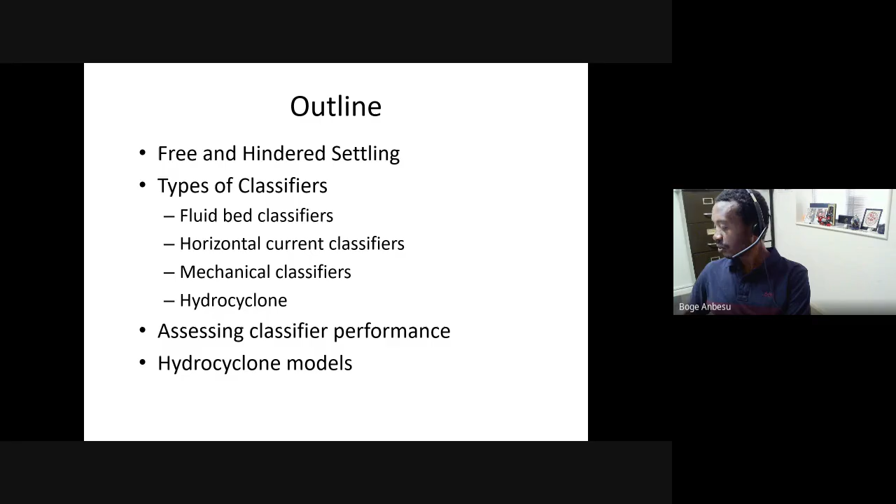We'll do a couple of examples on that to see how it's applied, and we'll also look at a couple of hydrocyclone models. This may not necessarily be what you need to know, but I want you to understand there are a number of models out there we can use to predict the performance of a hydrocyclone. The models can also be used to design hydrocyclones, and even to get an idea of how many hydrocyclones, for example, you'd need in a typical operation.

So in terms of classifiers, there are probably a few different types, mainly classified depending on how they actually work. For example, in sedimentation classifiers, you'll be dealing with fine material, say about 100 to 150 micron material, and you want to split it into very fine particles, say less than 20 micron, and coarser particles. To remove the finest particles into an overflow stream and recover the coarser portion, we can use water as an aid in the classification.

What we can do here is have a feed material containing different sizes. In sedimentation classifiers, pulp density is typically what we use to quantify the percent solids in the feed—say, for example, 50% solids coming in. What we normally use is water going against the feed: feed comes from the top, water goes against the flow. As we discussed last week, if particles can resist the upward flow of water, they settle through it and can be collected as a coarse product. But if particles are too small or too light, the water pushes them up and they go to the next classifier.

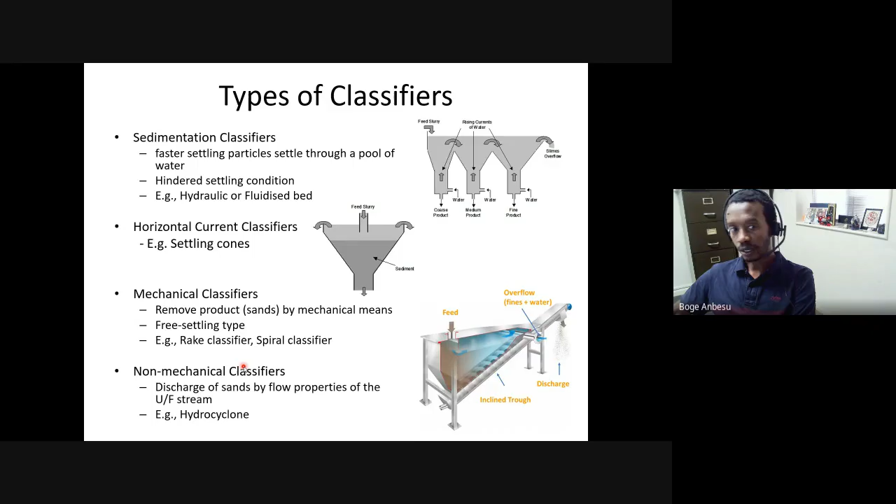They're purely based on the properties of the solids that we're feeding into this equipment. Based on the size of the solids we're feeding, or based on the density, we can track the motion of the particles and separate the coarser solids from the finer ones just by using cyclones. I'll talk about hydrocyclones in the next slides.

So how does a hydrocyclone work? A hydrocyclone is basically a conical shaped vessel, where your feed is introduced in a particular motion. When you introduce the feed to a cyclone, you introduce it from the top, and it follows what we call a tangential motion.

So feed is introduced and makes a spiral motion inside the cyclone. We're purposely introducing the feed in such a way that it forms a spiral motion inside the cyclone, and these are operated at very high pressures. The internal pressure inside the cyclone is very high.

What should happen is, as particles do this circular motion, if particles are coarse, they will have a net centrifugal force that pushes them to the wall of the cyclone. So coarse particles will tend to aggregate around the wall of the cyclone.

Fine particles will have a drag force influencing the motion inside the cyclone, and drag force usually acts inwards. So in this case, you have solids that are coarse or dense going to the wall, and solid particles that are smaller or lighter being dragged to the center.

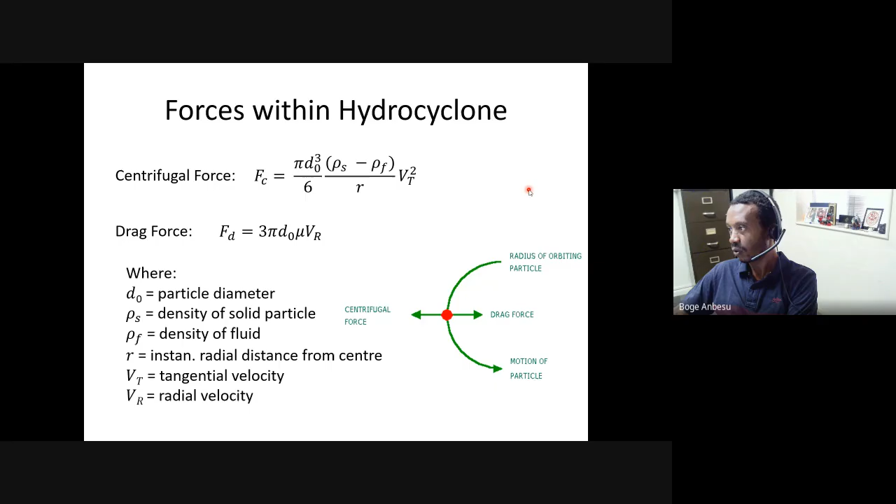Feed goes in initially unclassified, but as it goes down, because you're constantly feeding, particles are constantly coming, so whatever entered the cyclone will be pushed down and more feed will come in. This is a continuously operating process.

As particles go into the middle of the cyclone, forces will act on them, and the solids that are larger will be dragged to the wall of the cyclone, and eventually they will make their way down the cyclone and exit here.

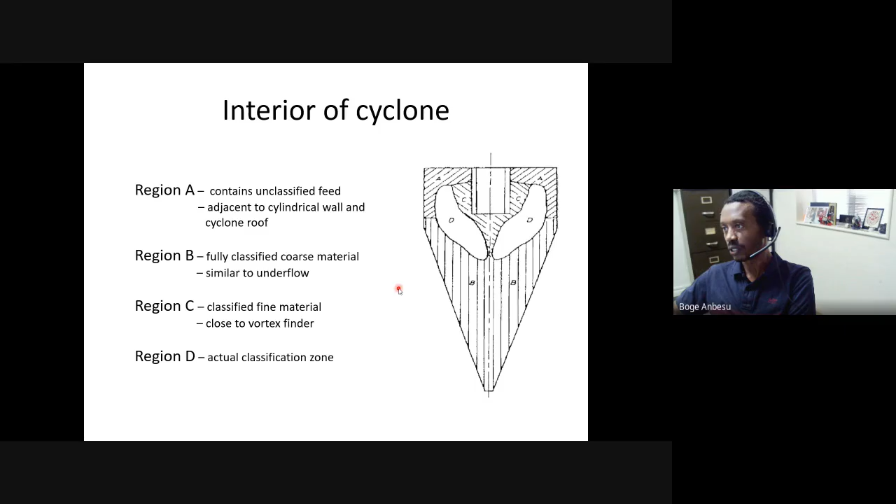I mentioned that when we introduce the feed into a cyclone, it's usually in a tangential motion, so we give it a swirly or spiral motion as it goes into the cyclone. There can be slightly different designs.

You can have maybe a bit of both. The partial involute takes a bit of the design of the tangential and that of the involute, and you can have that in this manner as well. Which one you choose will depend on your requirements and what you're trying to achieve.

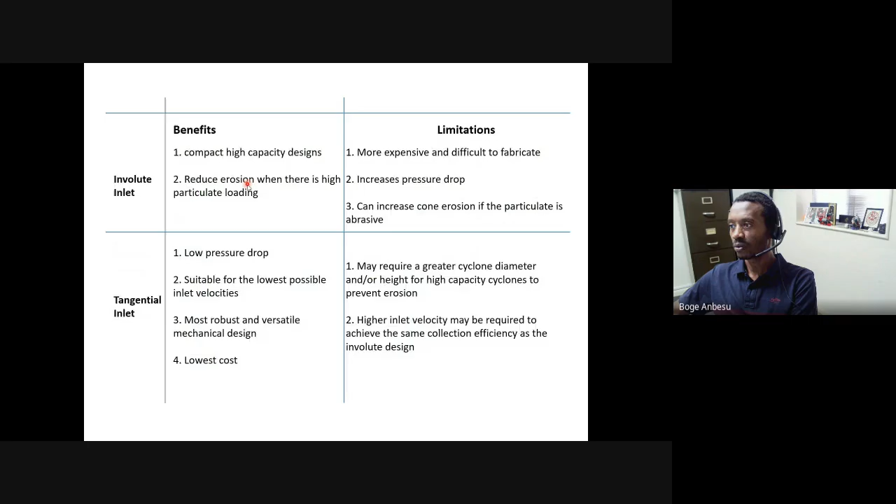The tangential motion is by far the most dominant, but there are benefits and limitations of each design. For example, in the involute design, it usually works well and is compact because you have a very wide opening area where the feed can enter the cyclone. You can also operate them at higher capacity.

As particles enter the cyclone, they will be dispersed, so erosion of the cyclone is not very high, unless you are overloading it or have abrasive particles, in which case erosion will still occur. But because particles are released into a wide area of the cyclone, erosion of the interior is usually minimized.

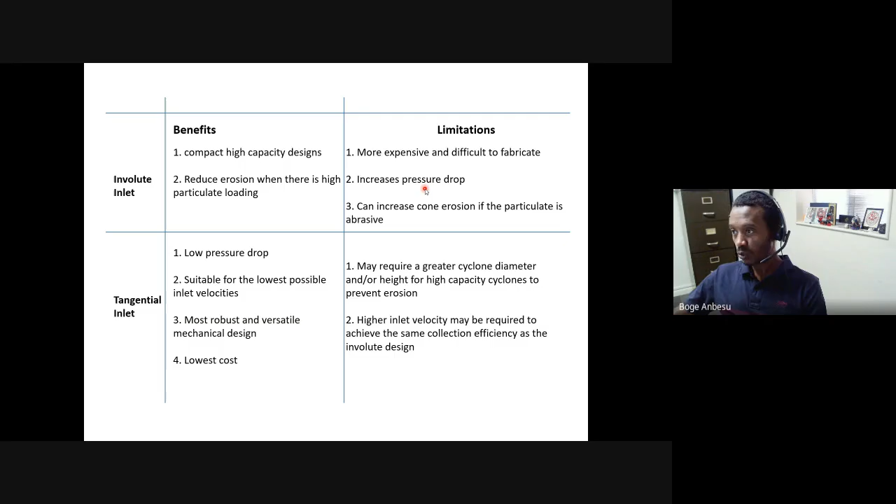What are the other limitations for the involute inlet? It's probably slightly more complicated to fabricate—not impossible, but more sophisticated than the tangential inlet. And because particles enter in a wider opening, you will have a significant pressure drop as particles go into the cyclone.

With pressure drop, the forces acting on the particles will vary. For example, with very high pressure, fine particles can attain centrifugal force and be drawn to the wall of the cyclone. If the pressure drop inside the cyclone is very high, meaning lower pressure inside, coarse particles may go to the overflow and report with the fine portion. These are some limitations to consider with significant pressure drop inside the cyclone.

In contrast, with a tangential motion, the opening is very minimal, so there's less pressure drop inside the cyclone, and fine particles can be classified properly. That's one advantage of a tangential motion—along with lower costs in comparison to the involute.

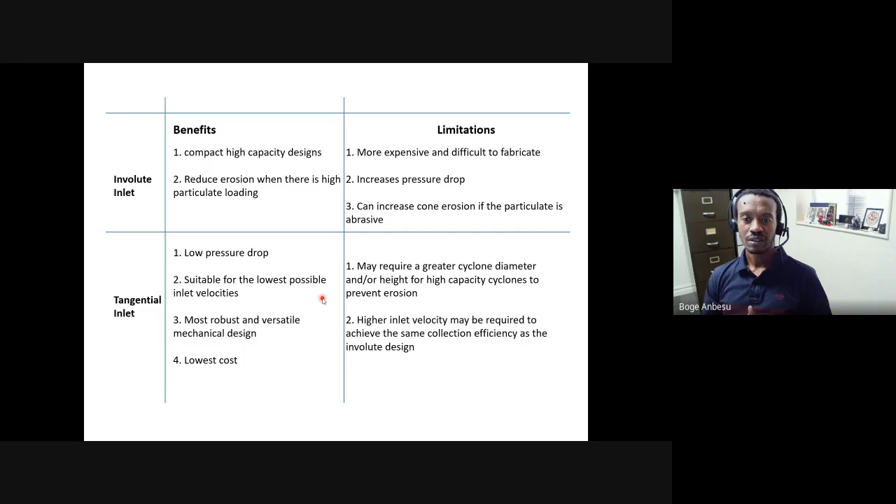As I mentioned, tangential inlets are very common in many places; people just use them as their cyclone feed, mainly because they're lower in design and cost, which is one advantage. One major limitation is that because feed goes in through a narrow opening, they usually have reduced capacity compared to the involute inlet, where particles can enter in a wide area, allowing the cyclone to operate at reasonably high capacity.

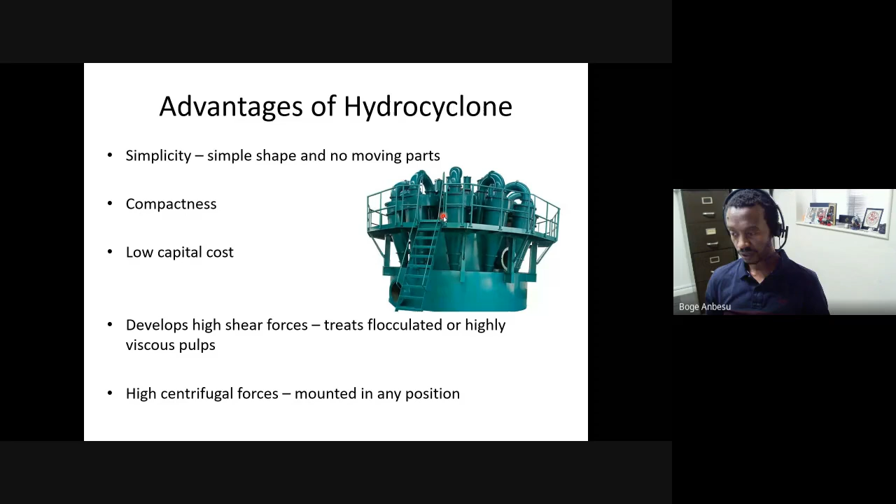Of course, if you want to operate them, you have to use a pump. So maybe pumps can be considered as moving parts, and they can be considered as a risk to operate. Also, because you need to generate very high pressure inside the cyclone, you may pay a lot in terms of energy because you're pumping the slurry at a very high rate. So energy consumption can be one of the issues associated with them.

And if you are looking at the wrong feed material, efficiency can be very poor as well. Sometimes that may mean if you have poor efficiency as a result of operational parameters, then your cyclone may not give you whatever you're expecting to get from it as well. For example, it could result in imprecise separation.

2 micron is very small in mineral processing, but if you wanted to go even beyond that, if you want to classify particles below 2 micron, they're not going to work, simply because of the requirement for very high internal pressure to be able to classify fine particles. As soon as you hit somewhere around 2 micron or lower, they're not going to be effective.

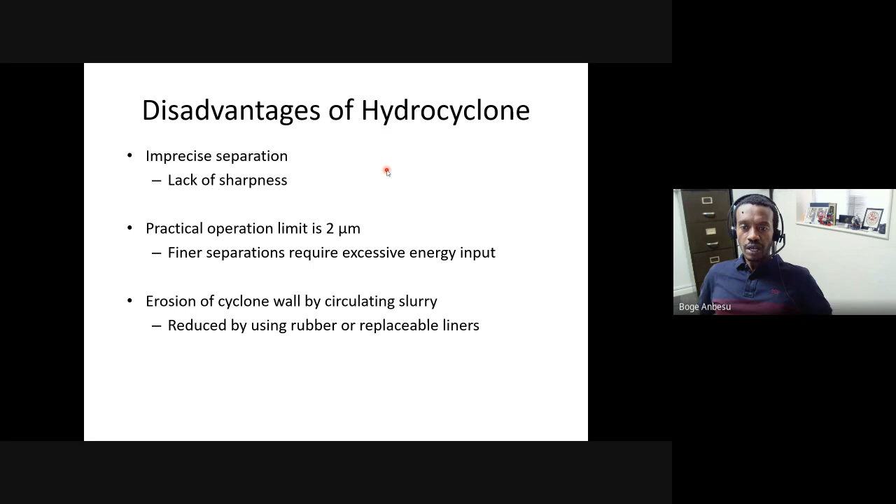And of course, because you're operating at high pressure, internal erosion could be very high. So the inside of the cyclone can deteriorate, can be eroded very quickly. For that, people use liners, so you can put rubber liners and so on, which you can replace every now and then. That can be used as a way of reducing cost associated with them.

So what could be the cause for inefficient operation of a cyclone? As we say, we have two streams generated from a cyclone: overflow fines and underflow coarse. Those are the two streams we generate. But it's possible, because the cyclone is just one single unit, for the fines to report to the coarse portion and the coarse portion to go to the fines.

The only way to control that is by the forces inside the cyclone, which govern what should go to what. For example, if you have dense particles that are really small, just because they're very small doesn't necessarily mean they go to the overflow or fine fraction. Especially when you have dense particles, even if small in size, they could still go with the coarse particles, because they may develop enough centrifugal force, and rather than going with the fines, since they're denser, they will probably go with the coarse particles. So that can be one reason for inefficiency of a hydrocyclone.

Or if you're feeding very coarse particles, they may not respond to anything that's happening inside the cyclone. In this case, coarse particles could randomly go to the fine or the coarse portion, and they may not be affected by the forces or hydrodynamics inside the cyclone. I'm talking about excessively large particles which you might introduce, and that can be another reason for inefficiency inside a cyclone.

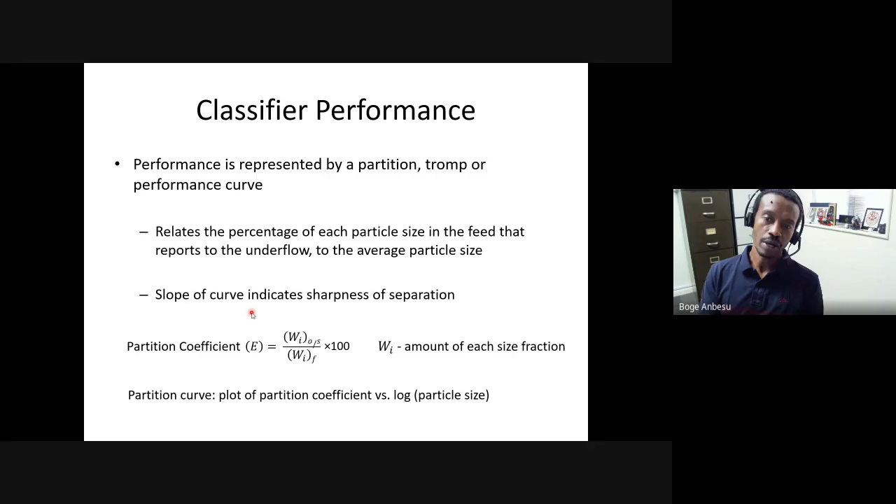So how do you measure that? How do you measure inefficiency? I think I mentioned this slide last week. We could develop a performance curve or partition curve where we track particles which are reporting to the coarse portion or oversize, as compared to the ones in the feed. We can develop a partition curve that looks like this one, to plot and see how efficient a cyclone is.

So I talked about causes for inefficiency in a cyclone, and I mentioned this curve last week as well. In this case, if it was a very efficient classification, this curve should be here at the bottom. But instead, we have about 25% of particles shortcutting into the coarse fractions. If this was my cut size, I'd expect all particles smaller than around here shouldn't go to the underflow or the coarse portion.

So all this should be somewhere here. But instead, I have an error because fine particles are going to the coarse fraction. That's what this one is saying, basically. Fine fractions going to the coarse.

Here, as you can see, if all the coarse went to the underflow, this should be 100%. This blue line should be here, but it's saying not all the coarse are actually going. So the curve is saying not all the coarse particles are going to the coarse fraction. Some actually are going to the fine fraction. That's why I have this less than 100.

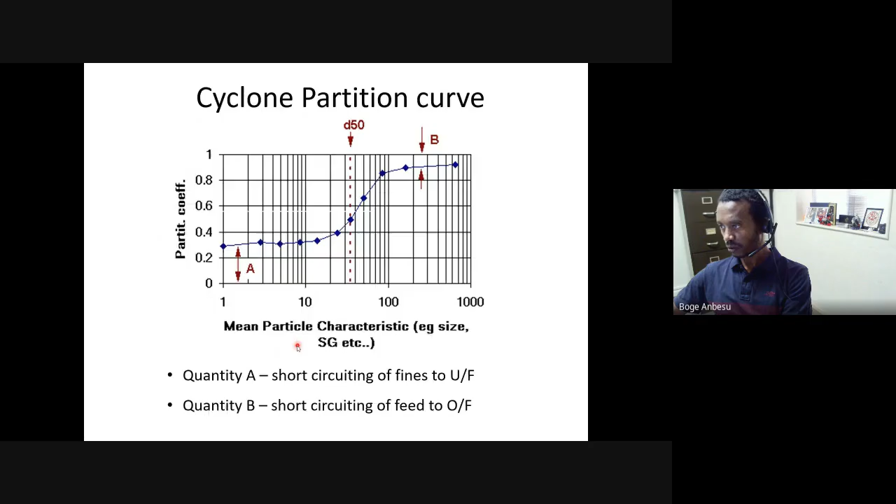I also showed you this formula, how we can calculate imperfection. Basically, it tells you whether a classifier is efficient enough or not. To give you a rough idea of how we interpret that equation, probably simplified using this one here. In this case, the partition curve can be constructed by working out recovery of particles in the underflow to that of the feed, for any given size.

Let's say 200 micron. What we're saying here is 200 micron particles in the underflow or coarse fraction in comparison to 200 micron particles that I initially had in the feed. So this is 200 micron particles that went to the coarse versus 200 micron particles in the feed. I just mentioned 200, but it could be any size - could be 500 micron that went to the coarse versus 500 micron particles in the feed, or 50 micron particles that went to the coarse versus 50 micron particles in the feed.

So this is how we define these two, and we can work out the recovery for each particle size that we had in our feed material.

For example, let's say you have 16 ton per hour material of a certain size in the feed. So maybe you started with 100 ton - the feed to the cyclone is 100 ton. Of that 100 ton going into the cyclone, maybe 16 ton per hour is 250 micron particle size. If that's the case, let's say of that 16 ton per hour particular size fraction, 12 ton per hour went to the underflow, which means the remaining 4 ton per hour actually went to the overflow. So when we write percentage reporting to the underflow, it is 12 divided by what we initially had in the feed, which is 16. So this tells you...

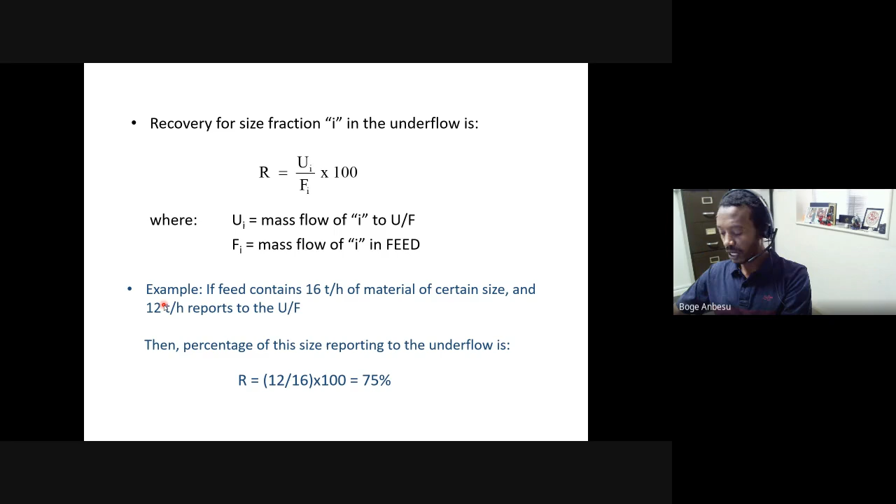In this case, for example, if about 25% of feed water reports to the underflow, with that 25% feed water, you actually have some coarse particles being carried as well, some fine particles being carried as well. So 25% of water material here actually says that maybe even out of the 12 tons per hour that I have collected, not all of it was because of classification.

Some of it is because of the water that's carrying the particles, and that is about 4 tons per hour for just the water. So about 8 tons per hour of that size fraction was collected because of classification, but about 25%, or about 4 tons per hour, was actually carried with water. And therefore, if I wanted to know the result of a true classification, that's only about 67%.

So how about the rest? The rest was actually because of the fact that water carries some of the solid particles with it. So if I wanted to maximize operation of a hydrocyclone, or improve efficiency, my water in the underflow stream should be minimized.

That's why I said earlier, if you have too much water coming in the underflow, if it's spraying too much as a spray discharge, then it's saying the underflow density is very low. It's saying there's a lot of water exiting. With water, you have not only coarse particles but fine particles exiting as well. And therefore, the efficiency should be significantly reduced. That's what this is implying.

But obviously, this is just for one size fraction, though we can do the same for various size fractions. If I give you a feed, that feed doesn't necessarily have one size, it probably has a very wide size. For example, if you just had a ball mill operating, producing particles that are very wide in size, from say 5 micron, 10, 20, 50 micron, 100 micron, 250 micron.

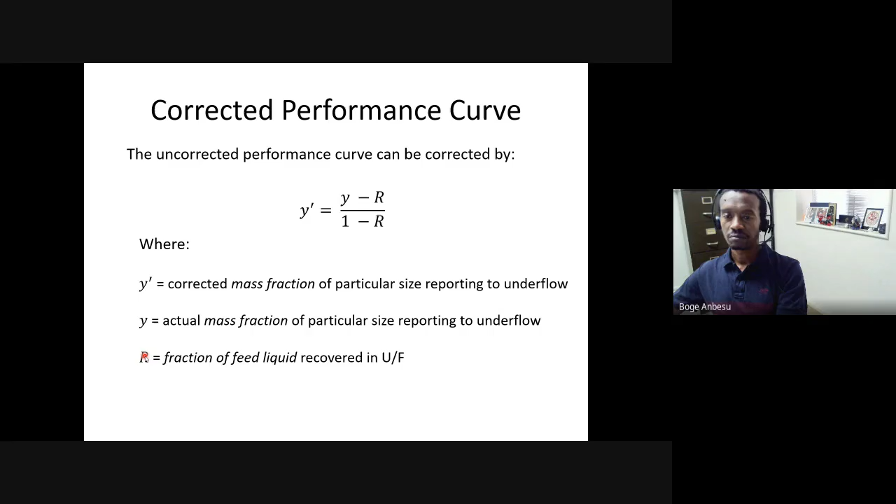So in this case, if you take into account the fraction of water exiting with the underflow, you have what we call a corrected performance curve. The R here simply takes into account the fraction of feed water that is being recovered in the underflow. As I said, the more this is, the lower your efficiency of a hydrocyclone performance is. So after correcting it, really what should happen is this should drop.

Another thing you could do is plot a reduced performance curve. The corrected curve mainly accounts for water, and with the water, we have solid particles being carried as well, which reduces performance. That's why we correct for that.

But sometimes you have 3 or 4 cyclones, and maybe you run different operations for different particle sizes, or even different minerals or different ores for different cyclones. So it's not really easy to compare one cyclone with one set of data against another cyclone with another set of data, or even another cyclone with a different mineral sample.

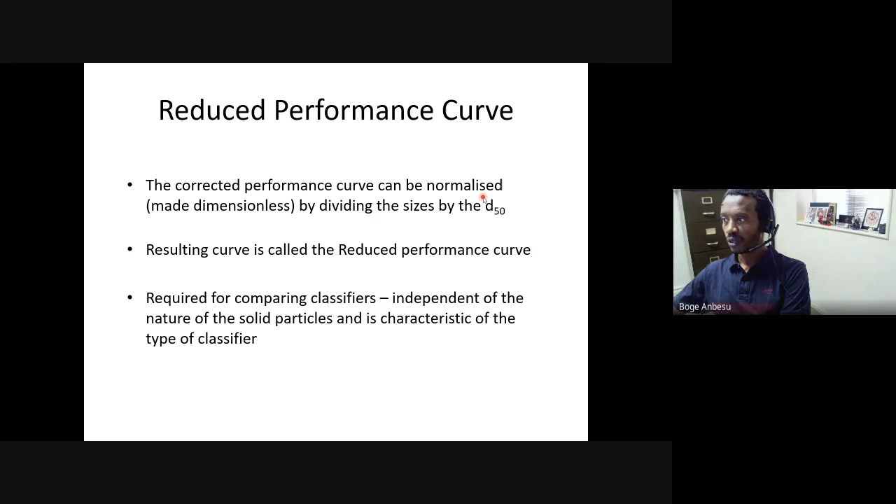So to limit the variation in operation and the variation in sample or nature of sample, you could actually use what we call the reduced performance curve. This is purely used to compare one cyclone from the other and see how each of those cyclones operate and what the performance of each of them is. To do that, we divide the reduced or corrected performance curve on the x-axis by D50.

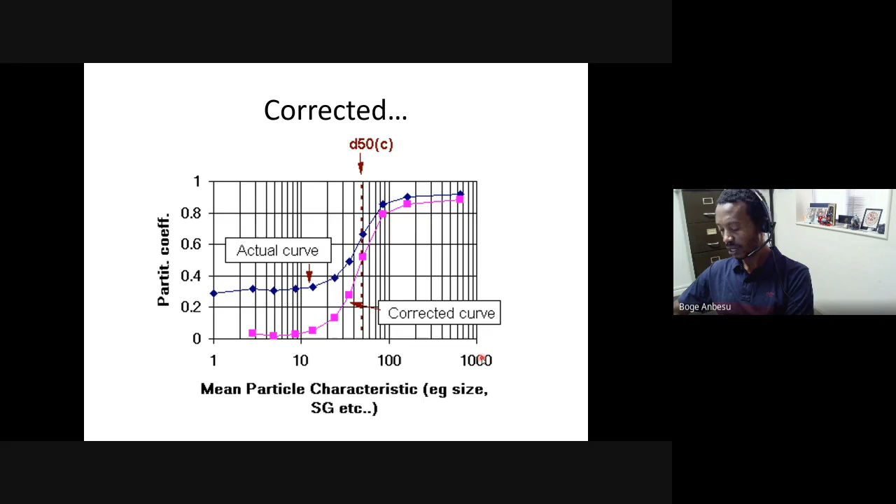D50 is simply a size at 50% partition coefficient. We take D50 and divide the x-axis by D50, and we normalize it. So in this case, the x-axis becomes dimensionless. Instead of having it in microns or specific gravity, if I divide the x-axis by the D50 size, it becomes dimensionless. So now it's not really dependent on particle size or specific gravity, just the curve simply compares different classifiers or different hydrocyclones with one another.

So by comparing just the curve, which has been normalized, I could predict which cyclone is more effective or more efficient. This is useful, especially when you're designing cyclones. People design cyclones with different lengths and different dimensions. They try them on different samples, and they can take the data and plot different performance curves for them, then compare and see.

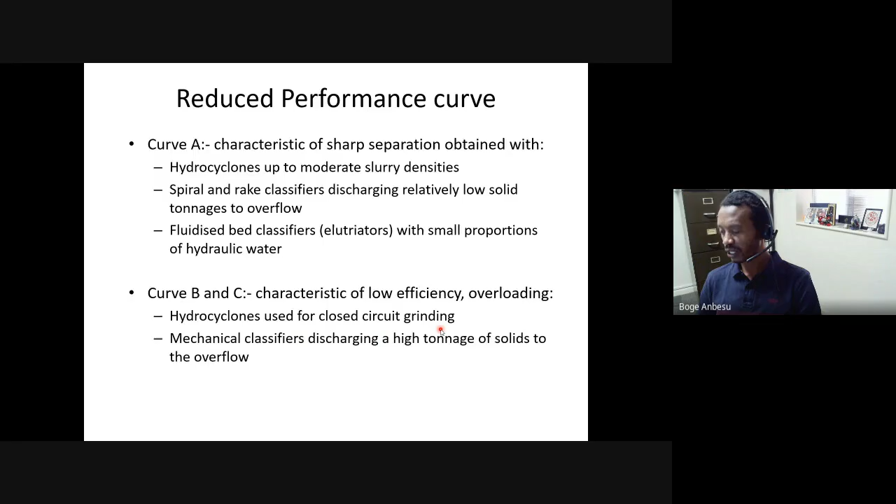So you need to look at the curve and see what you need to change. Typically what people do to optimize a cyclone's performance is look at two things. Either you change the feed water composition, so you reduce or increase the feed water going into the cyclone and try to optimize that.

Or the other thing you do is play with the pressure. Pressure can be increased or decreased. As you increase or decrease the internal pressure, you would then have the opportunity to either drag finer particles to the wall and reduce your cut size. With that, you may also improve the efficiency of the hydrocyclone or classifier performance.

So it all depends on those factors. Usually we don't play with modifying the cyclone itself. Yes, you can change the dimensions of the underflow, the dimension of the overflow or the vortex finder, or the inlet diameter. All those factors affect the cut size. I'll talk about that a little bit later on, probably in the last slide.

But in this case, usually you have the cyclone already designed and on site. You can play with operating variables like pressure and water first, to see if you can optimize the cyclone.

Okay, so probably I don't talk too much about models, but people have been trying to develop lots of hydrocyclone models in the past. Usually what we do is take data from a small lab scale cyclone, and maybe in this case also you might have a simulated pulp density.

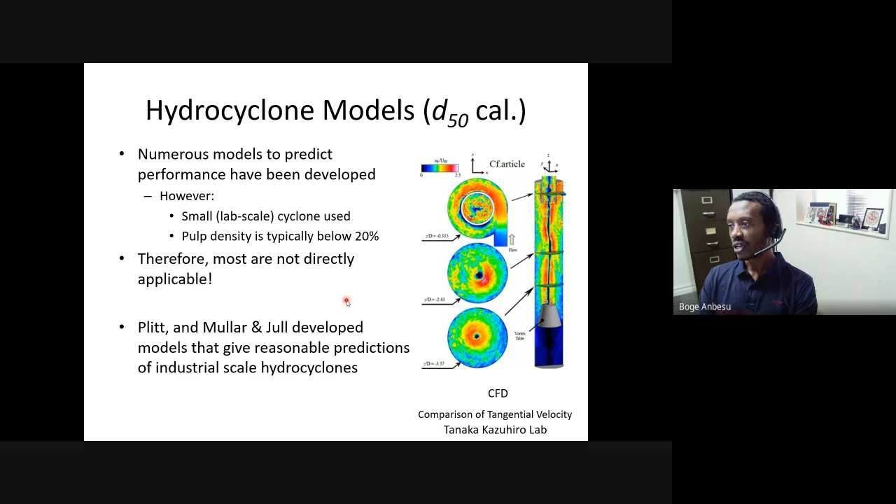But regardless, you can see how changing pressure affects cut size, or how it changes the hydrodynamics inside the cyclone. People use these models - for example, CFD, computational fluid dynamics - to work out the various hydrodynamics inside a cyclone by changing some variables, and typically they use that for developing different hydrocyclone designs. There are a couple of models commonly used in hydrocyclone design.

The first one is the Plitt hydrocyclone model, and usually applied, as I said, for larger diameter hydrocyclones with relatively high pulp density - these are probably close to what we actually see in the proper industry. In this case, the D50 is predicted using this model based on the diameter of the cyclone, the inlet diameter, the overflow or vortex finder's diameter, and the underflow diameter. H here is simply the height of your cyclone.

We measure it from the vortex finder to the apex, and that gives you the height of the cyclone. V represents the volume percent in the feed, and Q represents the feed rate in the slurry. You can also take into account the solid and liquid density - so the particles you're feeding, you take the average density of those particles, and if you're operating in water, you take the liquid density as the density of water.

Some cyclones use dense media rather than water, so you don't have to use water as a media - you can use other media. For example, you can make a media from very fine particles of ferrosilicon or magnetite, or you can even use hydrocarbons, which aren't really popular at this stage because they're toxic. But you can prepare a dense media, particles can be suspended in it, and hydrocyclones can be operated on that phenomena as well. If that's the case, you take the density of your media as the liquid density.

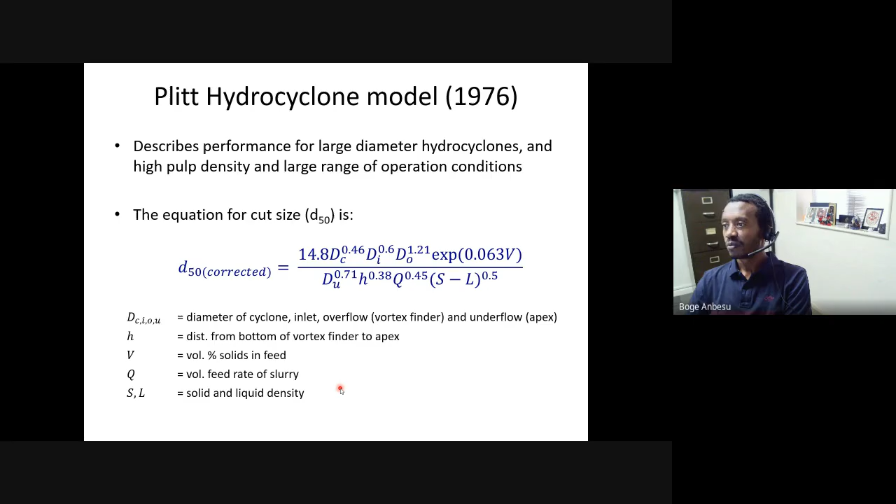Usually when we use - I don't know if you guys take a unit that deals with plant design and optimization, but if you do, you'd probably find some of these models in software. We use, for example, software like JKSimMet, or even Syscad, to optimize some of these models and predict cyclone performance. But those are probably for another course - I don't know which course necessarily - but you could find some of these models incorporated into a hydrocyclone model. For example, one option the software gives you could be Plitt's model, or you could have another model by Mullar.

You could have other models that could apply based on what you're looking at in that particular software package. Another similar one that you can use for predicting hydrocyclone performance and model parameters is the Mullar and Jull cyclone model.

For this one, you could have a custom built cyclone geometry with known dimensions: cyclone diameter, inlet diameter, vortex finder diameter, underflow diameter. Those can be fixed and predetermined already. You can then predict D50 from the slurry volume you are pumping into the cyclone, which you can measure, say fed at 100 meter cube per hour or whatever. So the cyclone diameter is already known, and you can predict the D50 values from measuring the volumetric slurry flow rate.

So where do you use the cyclone models? You can use them for design and optimization purposes to predict performance. Sometimes maybe you're just curious, so you ask what happens if I change this. You can run simulated models and see, for those hypothetical changes you're trying to implement in the plant, what may happen.

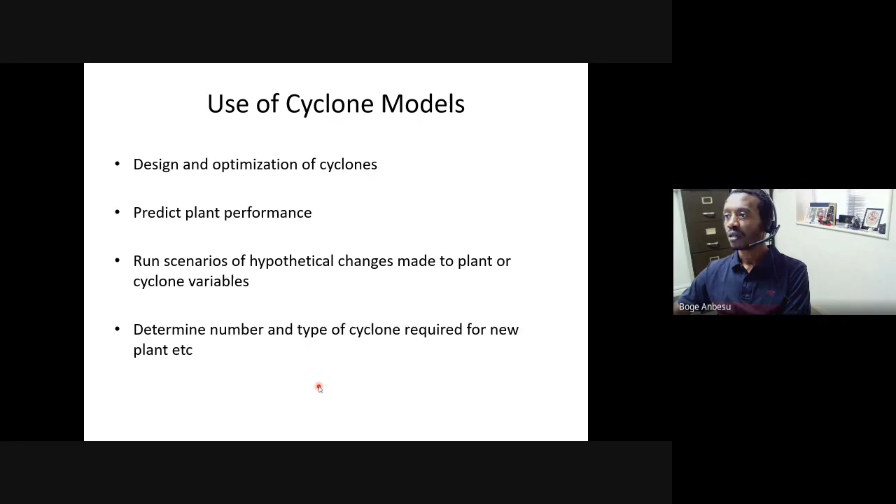So these are some of the things maybe you can keep an eye on. As I said earlier, if you're keen to optimize performance of a cyclone, maybe you can start with changing the density of the feed. If I increase density of the feed, meaning I'm putting more solids per volume, I should easily increase the pulp viscosity. We talked about when you have very high percent solids, you're talking about hindered settling condition where particles start to interact with one another.

Because of that, particles are not free to move inside the cyclone, and you should reduce the sharpness of separation. With sharpness of separation, what happens is coarse particles, instead of going to the underflow, may go to the overflow, which means you increase the cut size. So again, that can be one issue.

As I increase pulp density, I may reduce the pressure drop, so there's less pressure inside the cyclone. The change in pressure from the inlet to inside the cyclone will then affect whether I can separate coarse particles and draw them to the wall of the cyclone to exit through the underflow, or whether those coarse particles actually report to the overflow stream as well. These are some of the things that can happen, even theoretically speaking, before you touch anything. You can see changing pulp density will have consequences on a number of factors.

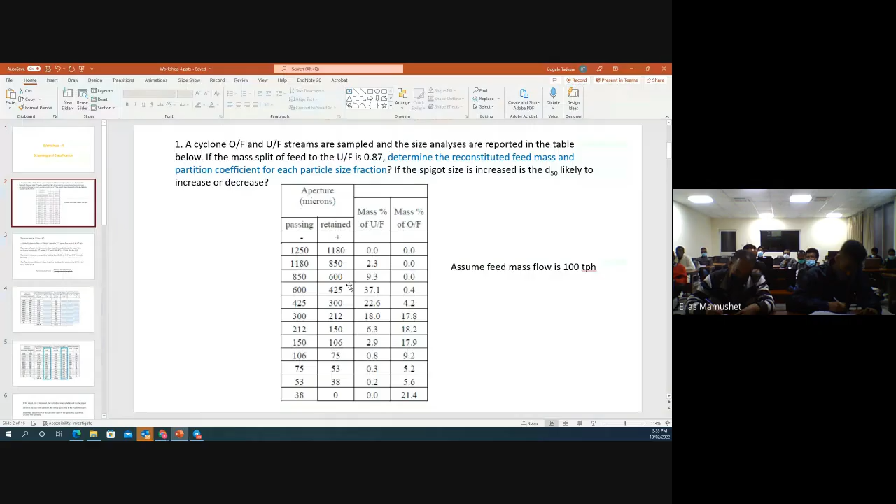Any other question, or you want me to explain that? Okay, so...

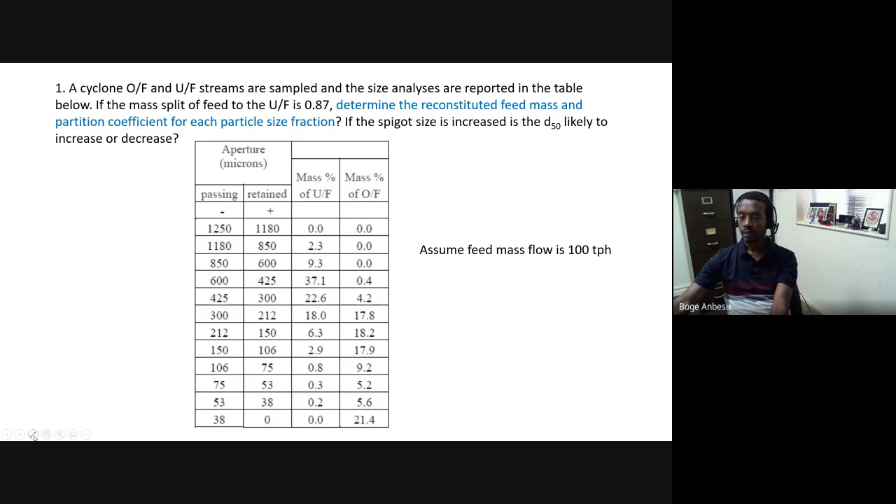Okay, so I think you can assume 100 tons per hour for the operation.

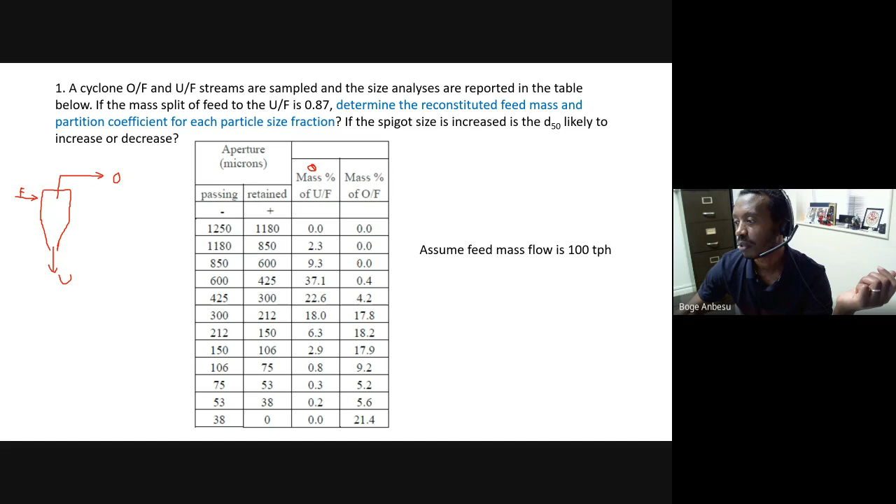እሱ ከአንደርፍሎ ሳምፕል ተደርጎ ፓርቲክል ሳይዝ ዲስትሪቢዩሽን ተሰራበት። ከዛ ይሄ ነው ዲስትሪቢዩሽኑ። ኦቨርፍሎ ሳምፕል ተደረገ፣ ከዛ ፓርቲክል ሳይዝ ዲስትሪቢዩሽን ተሰራበት፣ ዴን ዲስትሪቢዩሽኑ ይሄንን ይመስላል። ስለዚህ የተጠቀምነው ሜሽ ኦር የተጠቀምነው ሲቭ እነዚህ ናቸው።

ስለዚህ 100 ቶን ፐር አወር ከሆነ የጀመርንበት ፊድ 100 ቶን ፐር አወር ከሆነ፣ በተሰጣችሁ ኢንፎርሜሽን አንደርፍሎ ስንት ቶን ፐር አወር ነው፣ ኦቨርፍሎ ስንት ቶን ፐር አወር ነው የሚሆነው፣ ምንም ነገር ሳታደርጉ ካልኩሌት ማድረግ ትችላላችሁ። መጀመሪያ እንዴት ነው ማድረግ የምትችሉት? ስፕሊት ተሰጥቷችኋል እዚህ ጋር አንደርፍሎ ስፕሊት 0.87 ነው አዝ ኤ ፍራክሽን ወይም ደግሞ 87%። ይህም ማለት ከመቶ ቶን ፐር አወር ውስጥ 87 ቶን ፐር አወር አንደርፍሎ ጋር መሄድ አለበት። ስለዚህ የቀረው 13ቱ ኦቨርፍሎ ጋር ይሄዳል ማለት ነው።

ስለዚህ this is just a basic framework ምንም ነገር ከማድረጋችሁ በፊት። ይሄን ዲስትሪቢዩሽን ከሰጣችሁ ይሄ በፐርሰንት ነው የተገለጸው። እዚህኛው ላይ ሪቴን የተደረገው ይሄ ነው፣ እዚህ ላይ ሪቴን የተደረገው ይሄ ነው ተብሎ ነው የሰጣችሁ።

ከፐርሰንት ይልቅ ማሱን ከፈለጋችሁ ለምሳሌ በዚህ ሳይዝ ሬንጅ 2.3% ነው ያለው ወደ አንደርፍሎ የሄደው። ግን ከፐርሰንት ይልቅ አክቹዋል ማሱን ከፈለጋችሁ በ87 ብታባዙት ማሱን ማግኘት ትችላላችሁ። ስለዚህ 2.3% ታይምስ 87 ቶን ፐር አወር አክቹዋል ማስ ማግኘት ትችላላችሁ እዚህ ጋር። ስለዚህ ለሁሉም ማስ ማግኘት ትችላላችሁ በ87 በማባዛት።

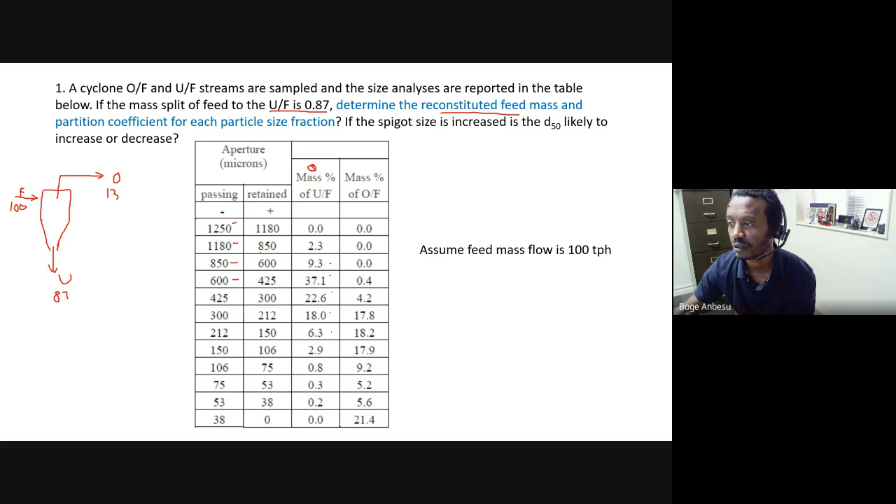ፓርቲሽን ኮኤፊሽንት ከርቭ ለመስራት ምን ያስፈልጋል ብያችኋለሁ? አንደርፍሎ ቱ ዘ ፊድ ነው ፕሎት የምናደርገው ዳታውን ለማግኘት። ስለዚህ ኦልሬዲ አንደርፍሎ ካገኛችሁ እዚህ ጋር ማስ ኦፍ አንደርፍሎ ፎር ኢች ሳይዝ ፍራክሽን፣ ፊዱን ደግሞ ካገኛችሁት ፎር ኢች ሳይዝ ፍራክሽን፣ ፓርቲሽን ኮኤፊሽንቱ መስራት ትችላላችሁ ማለት ነው።

ስለዚህ ይሄ የሚለው 87% ነው። ስለዚህ አንደርፍሎ 87 ቶን ፐር አወር ነው፣ ኦቨርፍሎ 13 ቶን ፐር አወር ነው። ስለዚህ እንዳልኳችሁ ወደ አንደርፍሎ የሚሄደው 87 ከሆነ ይሄንን ኮለም በ87 ማባዛት ነው። ስለዚህ እዚህ ጋር ቶታሉ እንዲሆን የምትፈልጉት ስንት ነው? ተደምሮ 87 ቶን ፐር አወር ነው፣ ይሄ ደግሞ ተደምሮ እንዲሆን የምትፈልጉት 13 ቶን ፐር አወር ነው። 87 እና 13 ቶታል ናቸው። ቶታል ማስ ከ100 ቶን ፐር አወር ብንነሳ የምናገኘው ማስ ናቸው ወደ አንደርፍሎ የሄደውና ወደ ኦቨርፍሎ የሄደው።

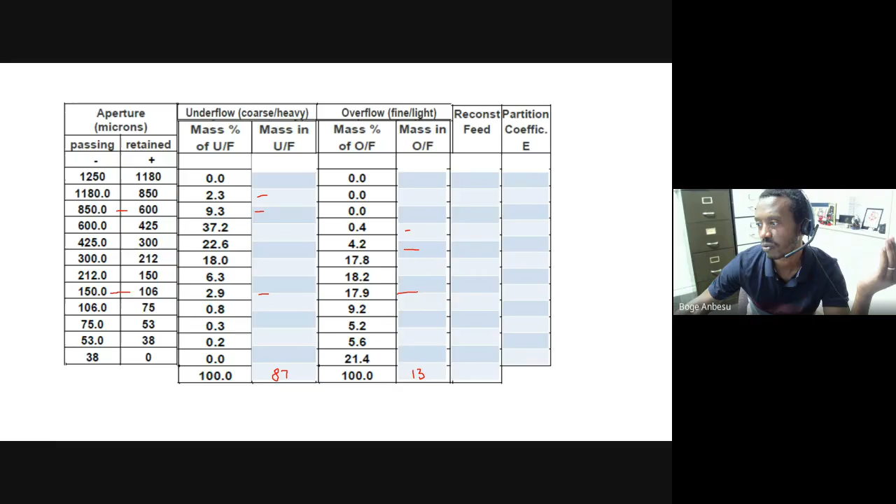ስለዚህ 2.3 by 87 እዚህ ጋር የሆነ ቫልዩ አገኙ፣ 9.3 by 87 እዚህ ጋር የሆነ ቫልዩ አገኙ። ለዚህም እንደዛው 0.4 by 13፣ 4.2 by 13 እያልን ቫልዩ ማግኘት እንችላለን። ያን ካረግን ማስ ኦፍ this size fraction ለምሳሌ in the underflow እናገኝለታለን። ኦር mass of this size fraction in the underflow ቫልዩ እናገኝለታለን፣ mass of this size fraction in the overflow ቫልዩ እናገኝለታለን። ስለዚህ ያደርግን ያለነው ለእያንዳንዱ ሳይዝ ፍራክሽን ምን ያህሉ ነው ወደ አንደርፍሎ የሄደው፣ ምን ያህሉ ነው ወደ ኦቨርፍሎ የሄደው የሚለውን ነው የምናገኘው።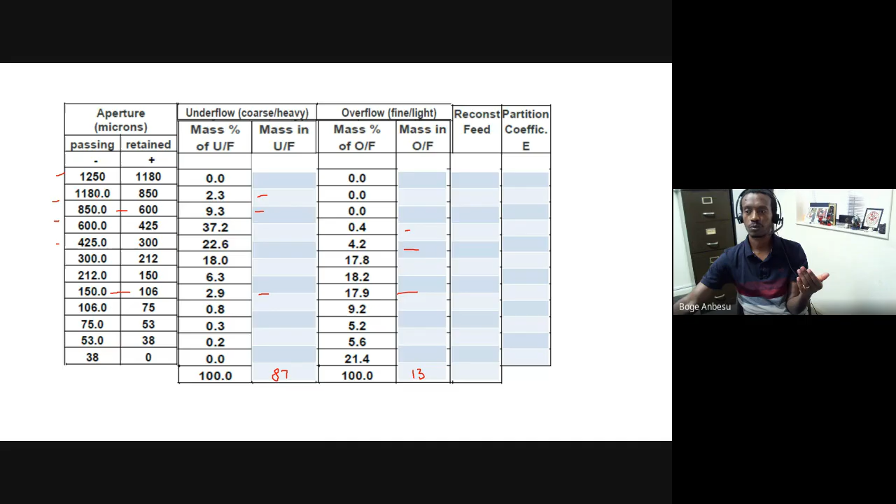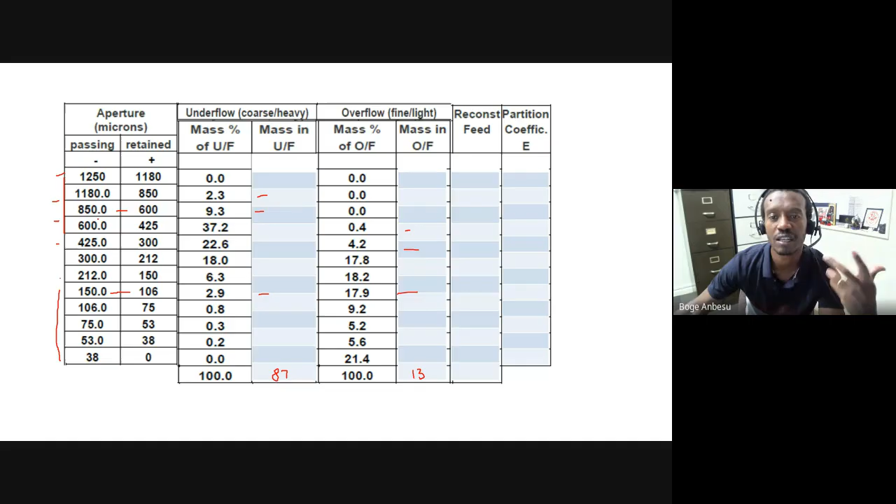ለእያንዳንዱ ሳይዝ ፍራክሽን ይሄ እንዴት ነው የሚወሰነው? ይሄ እንደ ኦፕሬሽኑ ነው። አንዳንዱ ፓርቲክል ሳይዙ ሲጀምር ለምሳሌ 500 ከሆነ ኮርስ ፓርቲክል የሚባለው ከዚህ በላይ ያለው ማድረግ there is no point፣ ምክንያቱም ምንም እንደሌለ ካወቅን ይሄን ሲቭ መምረጥ የለብንም ማለት ነው የግድ። አንዳንድ ኦፕሬሽን ደግሞ ሜቢ ፋይን የሌለው ኦፕሬሽን ሊሆን ይችላል። ስለዚህ ለምሳሌ ከ150 በታች ምንም ከሌለ እነዚህን ሜሽ ሳይዝስ መጠቀም አይጠበቅብንም ማለት ነው። ስለዚህ የምንሰራው ፓርቲክል ሳይዝ ዲስትሪቢዩሽን የሚወሰነው ራፍሊ ባለን የፓርቲክል ዲስትሪቢዩሽን ነው።

ሶ ሪጋርድለስ ይሄንን ኮምፕሊት አድርጉት፣ ይሄንን ኮለም በ87 አባዙት፣ ይሄንን በ13 አባዙት፣ you should have something like this. 2.3 by 87 ሁለት ነው፣ 9.3% by 87። ስለዚህ እነዚህ ፐርሰንት ናቸው። 100 ቶን ፐር አወር እንደመነሻ ብንወስድ ወደ አንደርፍሎ ከሄደው ፓርቲክል ውስጥ ለምሳሌ 5.5 ቶን ፐር አወሩ ቢሎንግ የሚያደርገው እዚህ ሳይዝ ውስጥ ነው እያልን ነው። በተመሳሳይ ደግሞ 2.4 ቶን ፐር አወር ወደ ኦቨርፍሎ ሄዷል ለዚህ ሳይዝ ፍራክሽን።

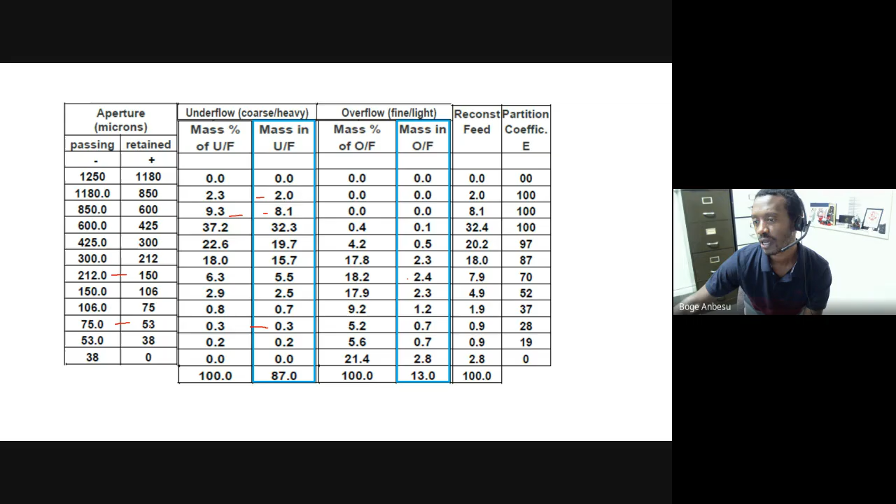ዊ ዱ ዘ ሴም። ለምሳሌ ይሄን ሳይዝ ፍራክሽን ብንወስድ እና ኦፕሬሽኑ 100 ቶን ፐር አወር ቢሆን ከዛ ውስጥ 0.3 ቶን ፐር አወር ቢሎንግ የሚያደርገው አንደርፍሎ የሄደው እዚህ ሳይዝ ፍራክሽን ውስጥ ያለው ነው። በተመሳሳይ ደግሞ ይሄ ሳይዝ ፍራክሽን በኦቨርፍሎ የሄደው 0.7 ቶን ፐር አወር ነው። ስለዚህ ያወራን ያለው ኢንዲቪጁዋል ሳይዝ ፍራክሽንስ going to underflow and overflow. Okay, I hope it makes sense. ስለዚህ ፊዱን ስፕሊት ነው የምናደርገው ወደ ሁለት፣ ኦቨርፍሎ እና አንደርፍሎ። ስለዚህ ፊዱን ማግኘት ከፈለግን መደመር እንችላለን ሁለቱን። እንዴት ነው የምንደምራቸው?

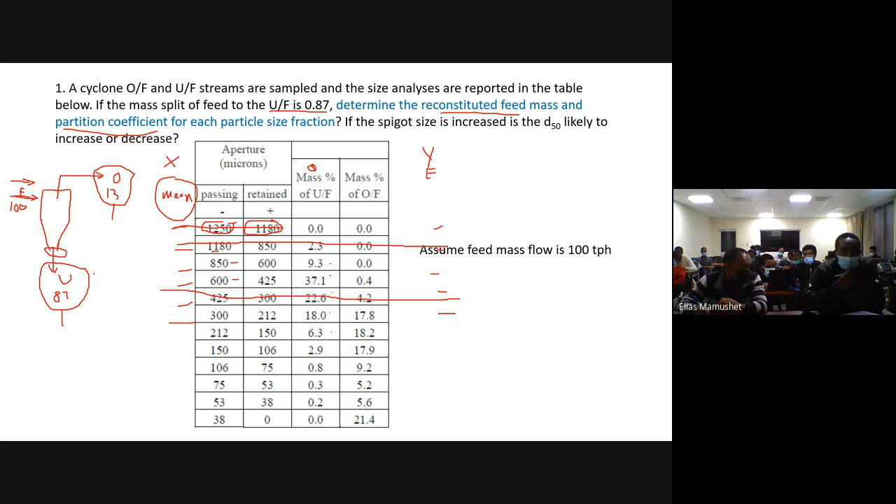So another question? Yep. Okay, in the cyclone, the assumption is the feed is equal to underflow plus the overflow. But what if there is a loss? How can we manage that?

Okay, so the way a cyclone works is this is basically closed. So whatever goes to the cyclone goes in a pipe. Basically, you are pumping the pulp through a pipe, unless there is, of course, a leakage inside the cyclone. If there is a leakage inside the cyclone, of course, it's not going to work properly, because as I said, there is a very high pressure inside the cyclone. If you have a crack inside the cyclone, you should be able to visually see any crack on the cyclone, and you shouldn't operate that cyclone.

But regardless, here we don't have any material transported from one place to another. So the overflow is captured in a pipe, the underflow is captured in a pipe. As long as you sample that properly, there shouldn't be any loss, essentially, right? So that's why we don't assume any potential losses in underflow or overflow. So basically whatever you add up between the overflow and underflow should give you the feed. Otherwise, if there is, I don't know, I'm not familiar with any other way of operating a cyclone where there is a potential loss, but there shouldn't be any loss practically.

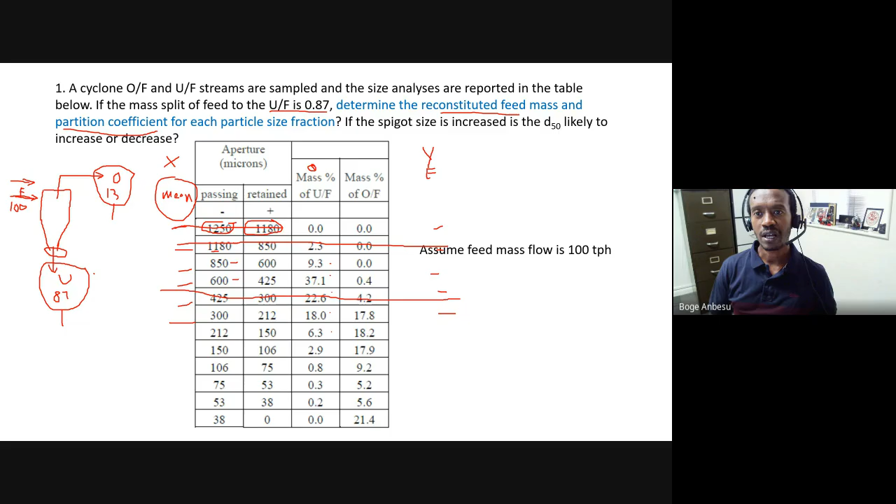But if you're asking, okay, I have some water with solids in it, but what I want to classify are 10 micron particles—then I say you have a problem here, because the particles can interfere with classification. So it depends on what we're looking for.

Okay, so as I say, cyclones can be used for desliming. If you do cyclones for desliming, what you're doing is getting rid of 10 micron particles. But cyclones can be used for beneficiation as well, based on density. If you do that, you are probably looking at 5 millimeter, 1 millimeter, 10 millimeter particles, very coarse particles. So those are different things and it depends on what operation you're using it for.

But in both cases, it is separating fine from coarse. At the end of the day, in both desliming operations and beneficiation operations, all we're trying to do is separate coarse from fine. But obviously, the level of coarse in one operation is totally different from the level of coarse and fine in another operation.

Okay, any other question?

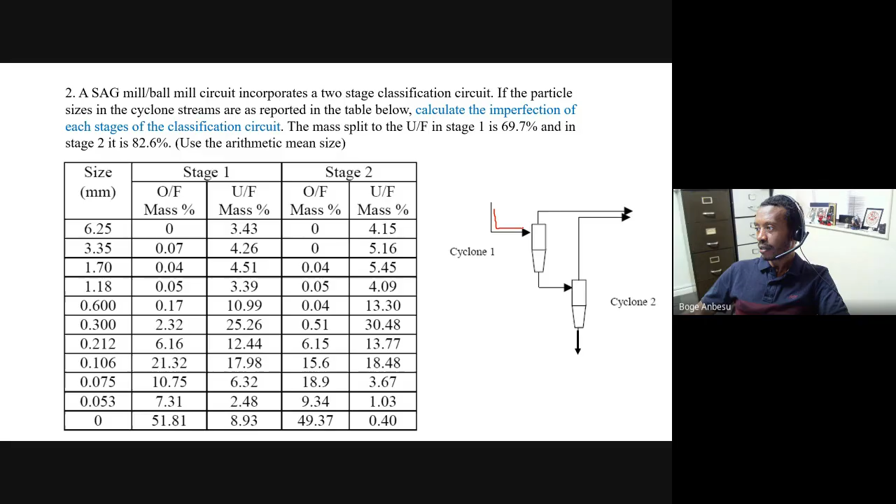Okay, so we have exactly the same problem as the previous one. So in this case, feed coming in the first cyclone, we have overflow and underflow. But the difference is once we have the underflow in this one, the underflow from the first cyclone becomes the feed to the second cyclone. And we split that into overflow and underflow.

Okay? So what is given in this table are samples and the corresponding particle size distribution. For the first stage, overflow and underflow represent this one and this one. So we take samples, we do particle size distribution on them to determine those. And for stage 2, this is the feed. We take samples from the underflow and overflow. We determine particle size distribution for also basically related problems.

And so you're being given particle size distribution for overflows and underflows. So basically what this one says is, this is if you wanted to write it in the same way as the previous one, like this, plus and minus, you can do that. So this one is plus 6.25, or in microns, that would be 6,250. So that's given in millimeters. You can convert it into one. And this range here is minus 6.25.

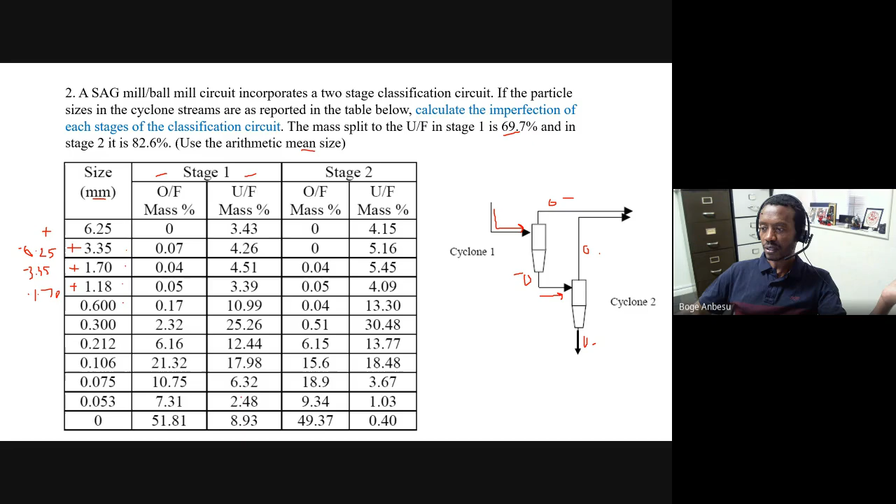So don't worry about stage 2 for now. For stage 1, it comes in, splitting into overflow and underflow, and in this case, the particle size distribution for each is given. Okay, so follow the same, it gives us a lot of information that you can reach with this one. That's basically the same concept.

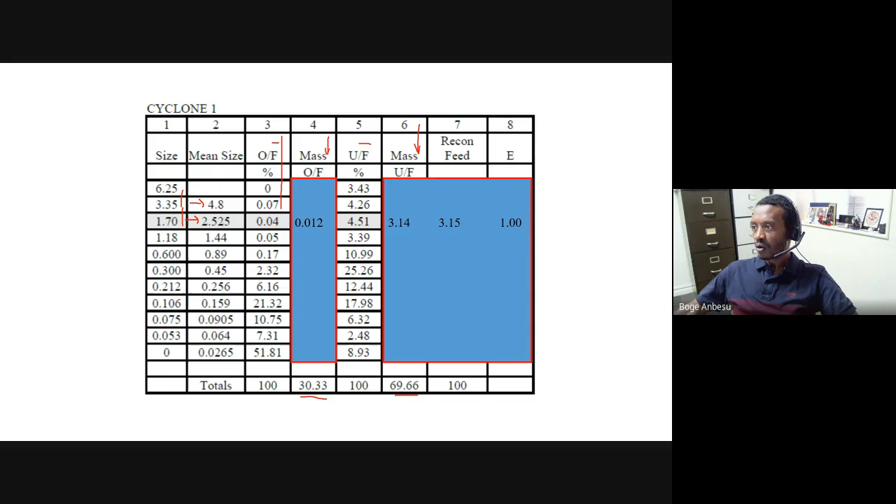For the remaining out of 100, we go to the overflow at 30.3. So multiply this by 30.3 to get this, and multiply column 5 by 69.7, we should get this one. So the first thing we can do is calculate column 4 and column 6 by simply multiplying by 30.3 and 69.6.

Of course, these ones are expressed in percent. So 3.43 means 3.43%, which is 3.43 by 100. So this is taking an example here. So if we have a 0.04 size fraction that belongs to this one, and multiply this by 30.3, you should get this value. And in the same way, 4.51 multiplied by 69.

And basically, you can complete all the other missing ones. Those are the same example.

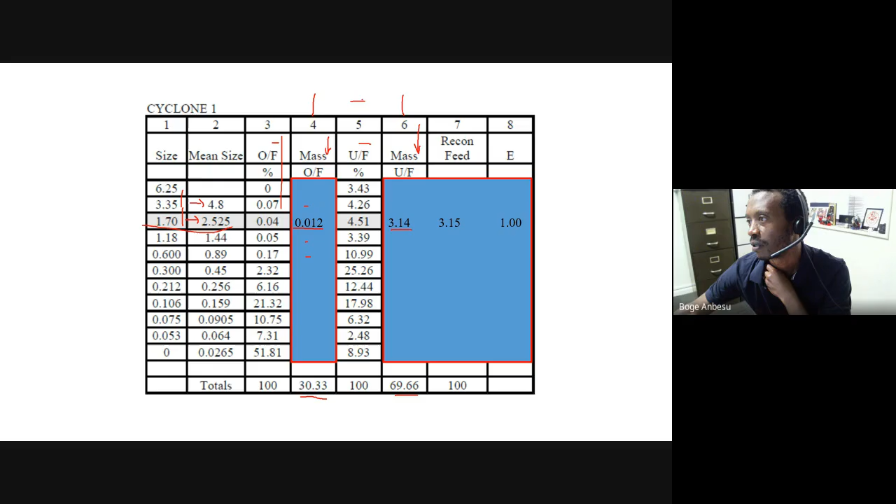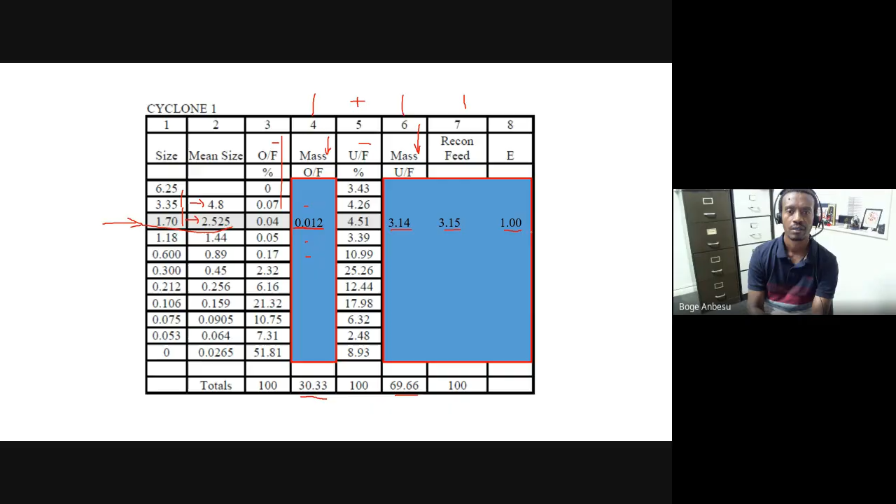So I think we can focus on just this one. If everyone can get these values, and for the feed they get these values, they can see why it is 1, or in this case 100%, either fractional or percentage. You can use either, go from 0 to 1 or go from 0 to 100, depending on whether you take percent or fraction. I'm okay with either way. So everyone tries that and let me know if those values don't make sense, or if you're not getting the same numbers, let me know and we can work on it.

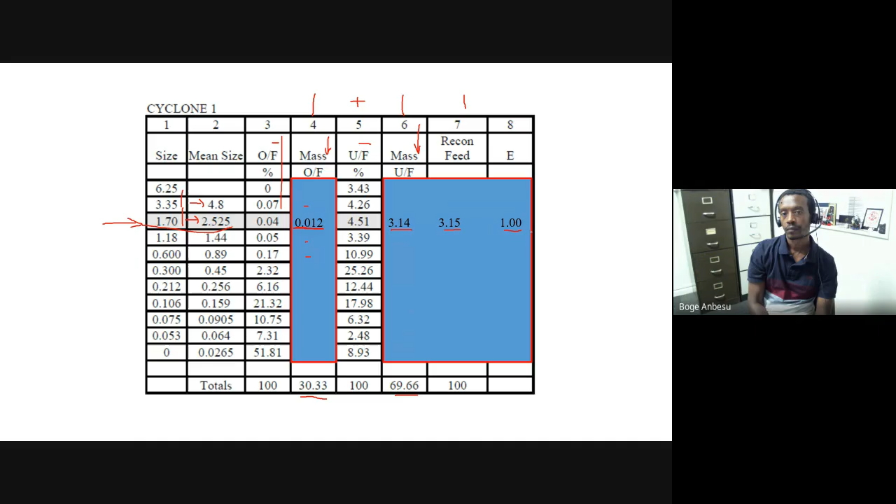So if we did those, I think this is how we should complete the table. As I said, the E here can be expressed in percent out of 100, so in that case 1 would remain 100. So whether you use 100 or 1, I'm okay. It doesn't really make a difference as long as you're doing the right thing.

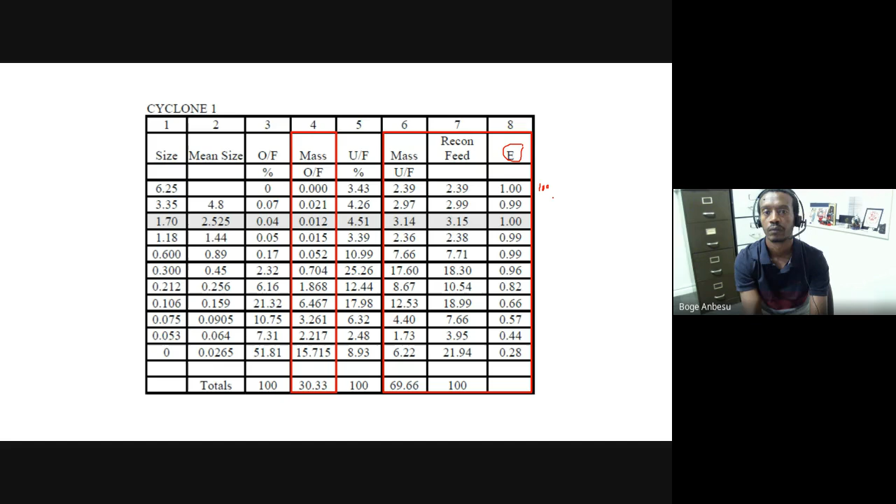So if you can see how we complete this table, then once I do this, now we can go with the next one. If you look at the cyclone information given, the split to the underflow was 69.7% for the first cyclone and 82.6% for the second cyclone, which means of whatever comes here, 82% splits the underflow. So I already know what comes here.

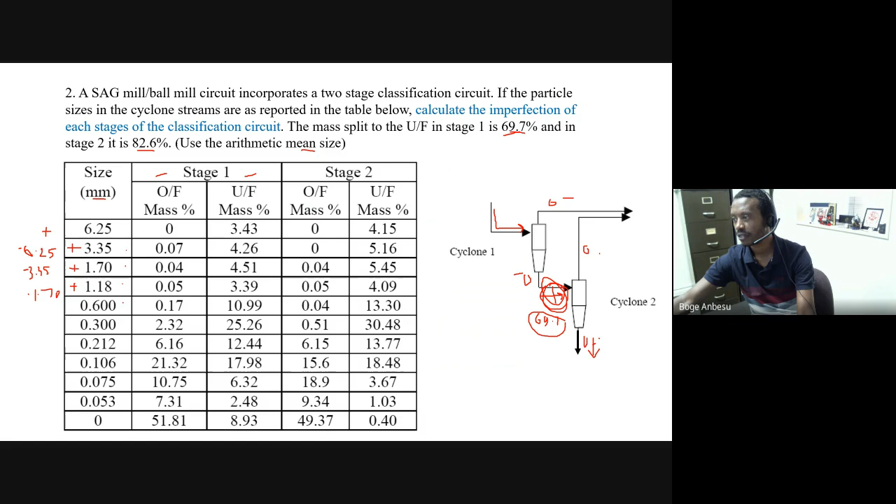What comes here from the previous example, if I assume 100 tons per hour operation, is I know 69.7 tons per hour comes to the underflow, which is now the feed for the second cyclone. Of that 69.7, 82% of 69.7 comes here. So basically we can work out 82.6% of 69.7 to get whatever goes to the underflow. And once you know that, you can always calculate 69.7 minus that to give you the overflow. So that's what we do for the second cyclone.

And in that case, second cyclone underflow split is 57.5 and overflow split is 12.2. And everything else is exactly the same.

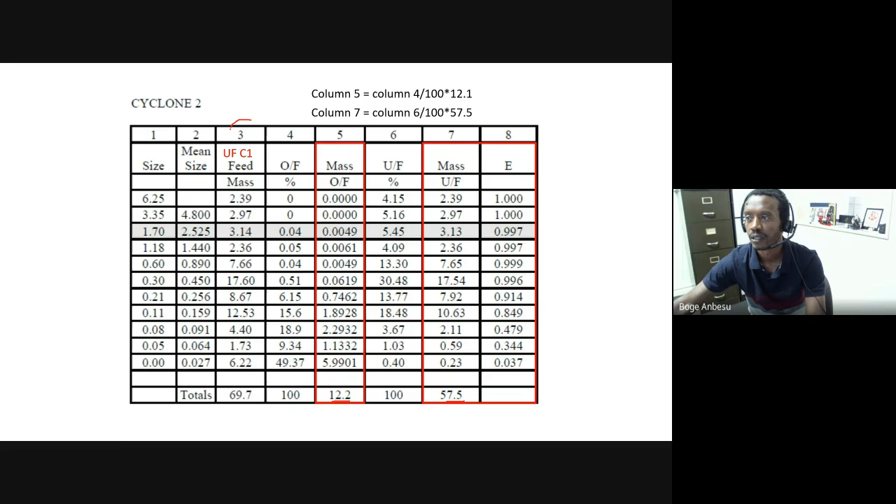So we've been given information about overflow, underflow size distributions. The difference is you can either use underflow from cyclone 1, which is now feed for cyclone 2, or I just add column 5 with column 7, and that should give me the feed into the second cyclone, which should also be similar to this one. So to get the feed for the second cyclone, it can be obtained by just taking the underflow from the first, or by adding overflow and underflow for the second cyclone. Either way should be very similar to this one.

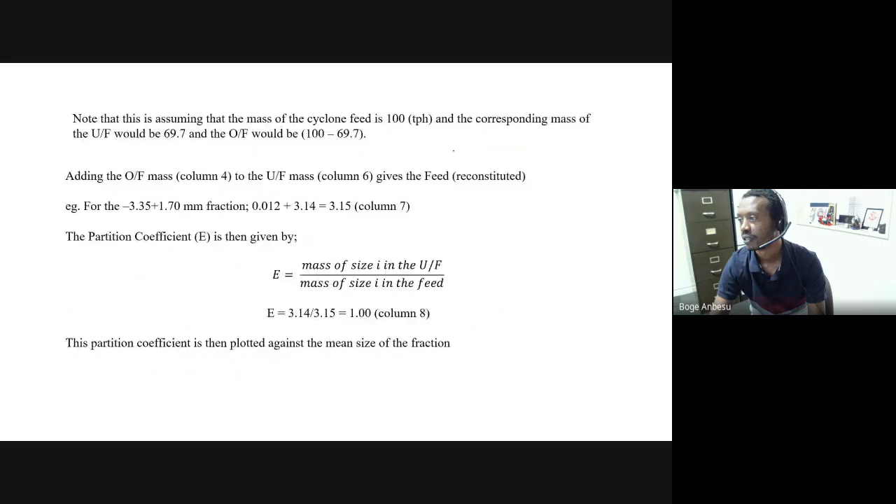Cyclone 2 is shown in blue, and you can actually get a combined classification from cyclone 1 and cyclone 2 as well. To get the combined, all you have to do is add underflow from the second cyclone and divide that with the feed for the first cyclone. So what I mean is, if you take underflow divided by feed, underflow for second cyclone divided by feed of the first cyclone, will give me the overall or combined cyclone performance.

Because what happened was feed came here classified, and then take the underflow classified. So these are the overflows, total overflows from the two, and this is my underflow. So basically, if we assume this as one unit, we have feed, overflow, underflow. So to get the combined, all we have to do is take underflow from the second, divide by feed to the first, which will give the combined, which should look like the one shown here.

So the question was to calculate imperfection. As I said, imperfection is dependent on D75, which is here for each of them. D75 for cyclone 1 is here, D75 for cyclone 2 is here. D50 for cyclone 1 is here, and D50 for cyclone 2 is here.

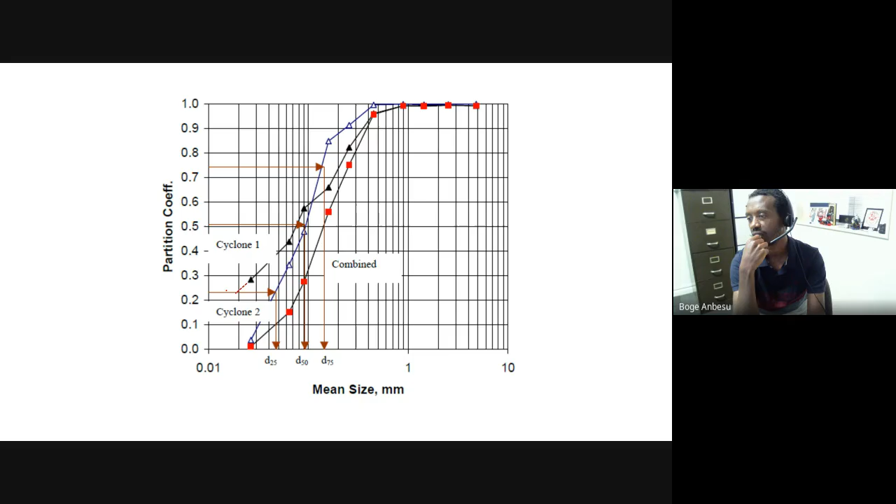For the first one, you need to extrapolate a little bit to get the D25, because the data points go one way, so you can consider extrapolating the curve, which may not be ideal, but I think this is the situation. You get these values here: for cyclone 1, imperfection is about 1.2, and for cyclone 2 imperfection is about 0.5. So comparing the two, the second cyclone is a lot more efficient.

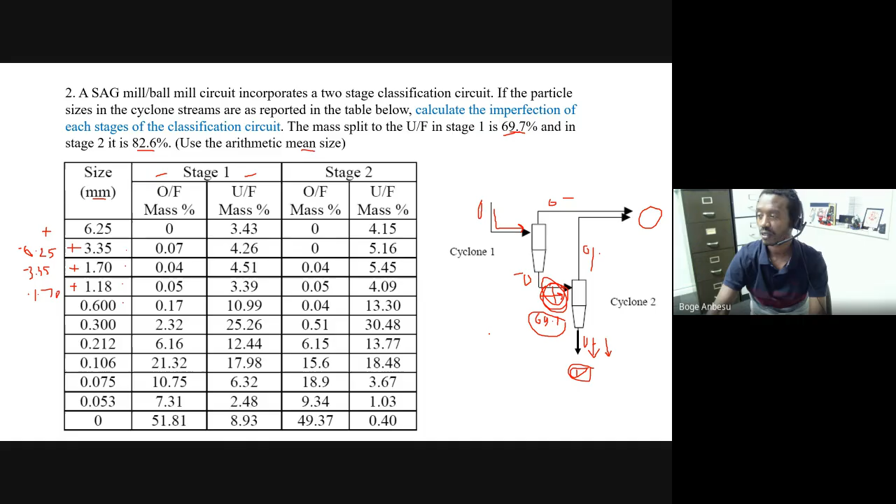You can think of why that might be the case. It's because the feed to the second cyclone is already classified - whatever flows to it, the underflow, is actually a lot more controlled in size, because the overflow has taken some of the fines out of it. So we're feeding a very narrow particle size range into the second cyclone, which is why it's a lot more efficient compared to the first cyclone.

And the combined would be somewhere between the first cyclone and the second cyclone. So the second cyclone is very efficient, the first cyclone is not so efficient - this is relative, so efficiency is again a relative term. If you get values less than 0.2, that usually represents an effective or efficient classifier. Somewhere between 0.3 to 0.5 is good. Over 0.7 is actually a bad classifier. That range can vary from place to place, from operation to operation, even depending on what kind of cyclone you're using. But generally speaking, less than 0.2 imperfection shows a very good classifier.

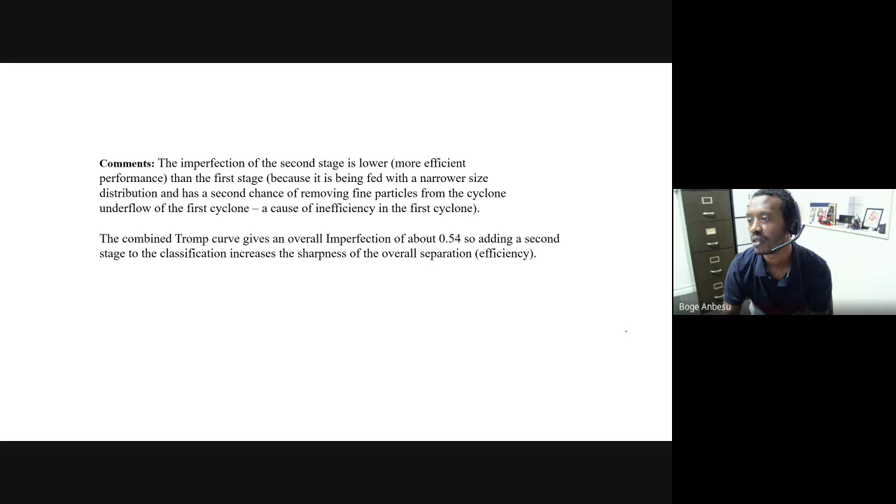So this is just to comment on why the efficiency of the second one is better than the first, and why the combined is lower than the first. The second cyclone should be efficient because the feed has already been classified by the first cyclone. So you should get a bit of exercise from the assignment and also from the lab work, hopefully, and have some understanding of how these things work. Feel free to ask questions.